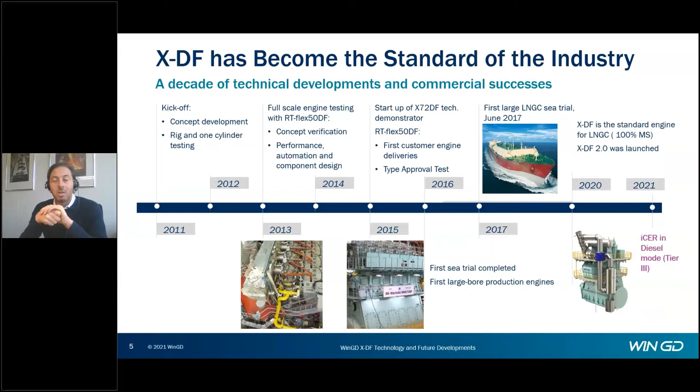We do this in 2 ways. One is to increase the efficiency of the engine, reducing gas and fuel consumption, and reducing maintenance. This year, 2021, we upgraded to the XDF 2.0 with iCER technology, using the same hardware, to reduce maintenance and increase efficiency, also in diesel mode to reach Tier 3, to reduce the CapEx.

Looking at the technology, at the concept of XDF: the secret is the low pressure. Low pressure means that we inject gas into the combustion chamber at 13 bar. This has several benefits. The first benefit is the gas supply system - 13 bar is a gas supply system that is relatively economically convenient. Also from a technological point of view, using the Otto cycle, we have very low NOx, much lower than the Tier 3 limits, and the efficiency is at a good level. So overall, the XDF is the best CapEx, OpEx product for LNG powered ships.

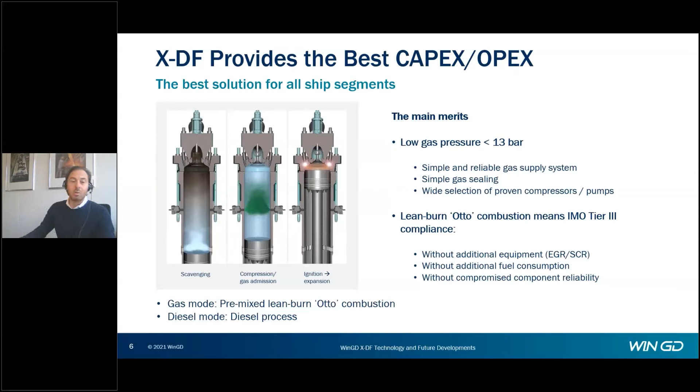Of course, we need to increase the efficiency and reduce the methane slip. That is the point that needs to be improved for the Otto cycle. There is a lot of margin for improvement, and that's what we are doing, what we have done, what we have solved with the XDF 2.0.

Let's have a first look at what the performance engineer wants to optimize in an Otto cycle engine: to enlarge the operating window. We have gas reactivity, which is an index of the lambda ratio, the air-fuel ratio. We have an operating window because we want to increase the BMEP as much as possible, but there are physical limits due to self-ignition or knocking. So gas reactivity or lambda control is very critical, and we want to enlarge the operating window as far as possible.

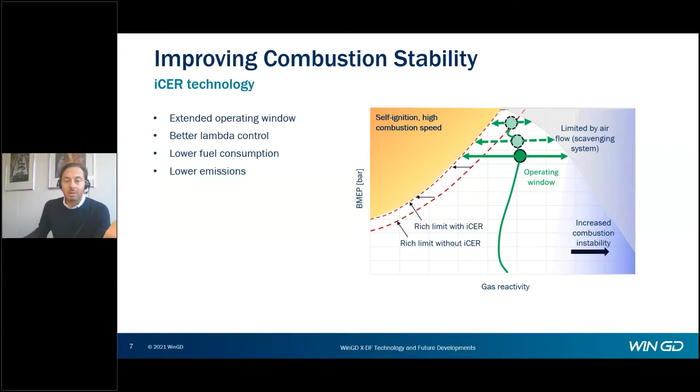That's why we came out with a solution: the iCER technology. iCER stands for intelligent control of exhaust gas recirculation. We recycle exhaust gas after the turbo, so it's a low pressure recirculation. Part of the exhaust gas is cooled and then reintroduced into the combustion chamber after the turbo, so it's a low pressure system.

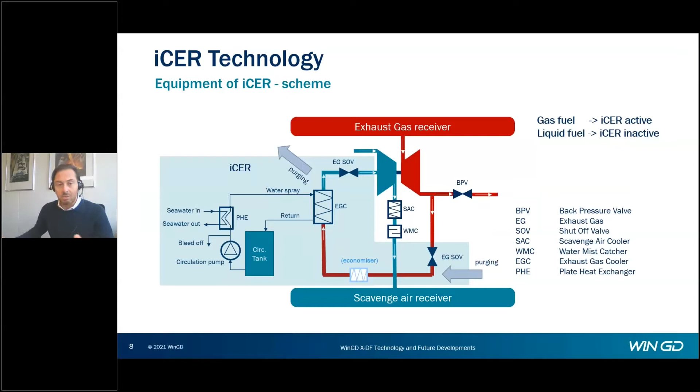Exhaust gas after the turbo is basically CO2 from the gas combustion. CO2 is, from the combustion point of view, an inert gas that facilitates combustion. In which way? I'll show in this slide. Introducing CO2 into the combustion chamber has the effect of reducing the firing pressure. The more we recirculate, the more we reduce firing pressure, and then we can also adjust the pilot injection.

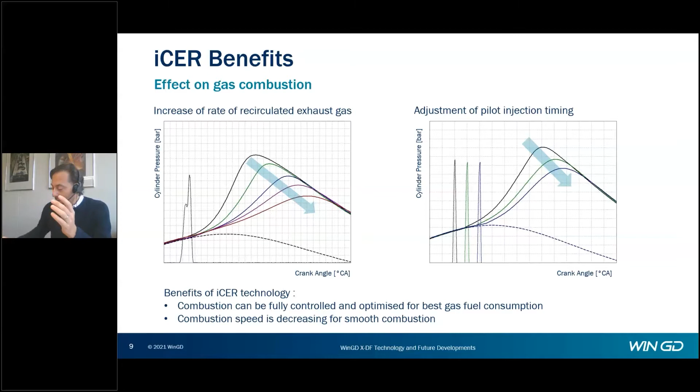So you can see we give our performance engineer another dimension to optimize the engine. Put simply, what we can do is increase the firing pressure, increase the compression ratio, and also change the injection timing. In this way, we achieve a reduction in gas consumption, a reduction in liquid fuel consumption in diesel mode, and most importantly, we reduce the methane slip.

We reduce the methane slip because of two important effects. One, the combustion is more stable, so we have less unburnt fuel. Second, because of the recirculation, we reduce methane slip by 40% to 50%.

That is remarkable, because I remember 10 years ago, the industry standard for methane slip was 6 grams per kilowatt hour. Today, with XDF 2.0, we are below 1 gram - we are at 0.8 grams per kilowatt hour. So the message is that methane slip is a technological problem, and there are solutions to solve it. That's a very important step forward.

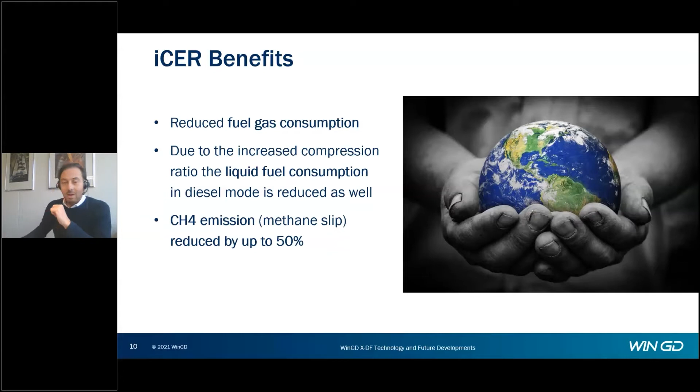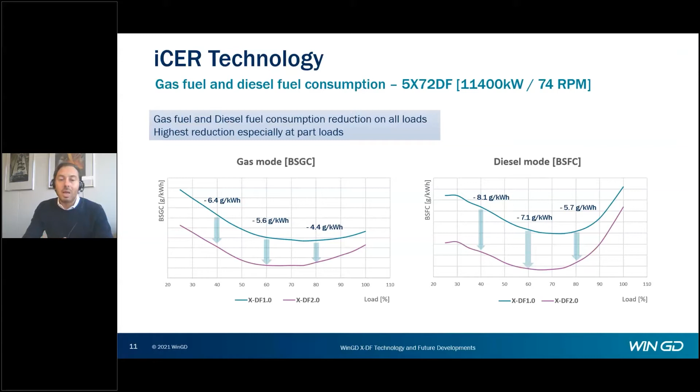But let's look a little bit at the reduction of gas consumption, which is also very important in terms of CO2 emissions. In gas mode, the reduction is between 6.4 to 4.4 grams per kilowatt hour, depending on the load. In diesel mode, iCER is bypassed for Tier 2 operation, but the reduction in fuel consumption is still applicable because of the increasing compression ratio - we are between minus 8 grams to minus 5.7 grams per kilowatt hour.

Compared to the traditional diesel engine, we have 20-25% less CO2 emissions. This is the first step for decarbonization, where WinGD is fully committed. Of course, if we look at the global picture, it's not only CO2 impacting greenhouse gas, but also all the emissions that impact air quality, like NOx, SOx, and PM, which we reduce to a very low level.

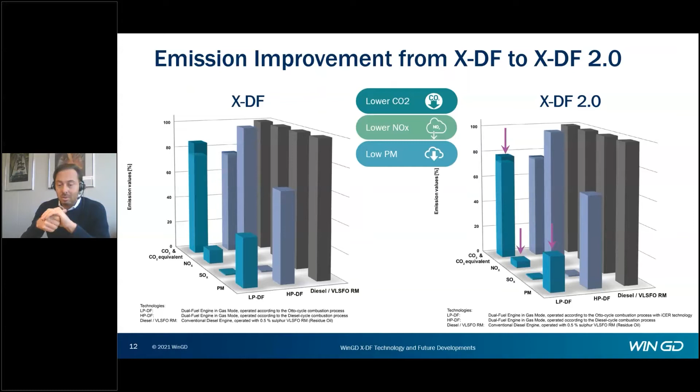So let's have a look at the iCER technology itself - how it looks on installation. It's an off-engine solution that needs to be installed close to the engine. We worked with major shipyards to have this accommodated in the engine room. This hardware is used in gas mode for reducing methane slip and increasing efficiency, but also recently this year, as I mentioned before, it's used in diesel mode to reach Tier 3 level. That's also a good compromise to reduce capex, because with the same hardware we also reduce the NOx level.

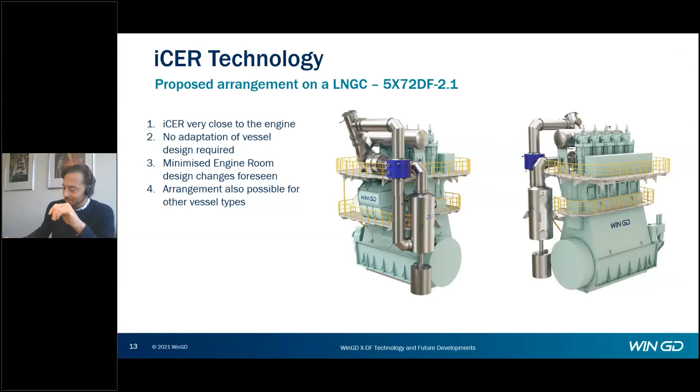So thank you very much, and just the concluding word is X-DF from Winterthur Gas & Diesel is the initial step to decarbonization. We are also considering alternative fuel to be burned in the same engine platform. So hand over to you, Jeremy.

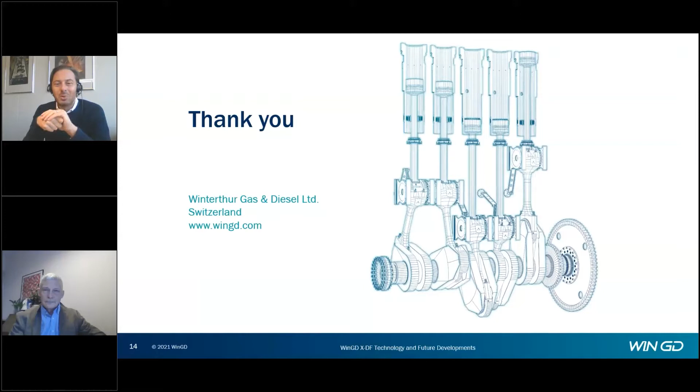Super, thank you very much, Carmelo. That was a nice introduction to our session today, and really impressive to see, in particular, the emissions reductions that you have brought into being.

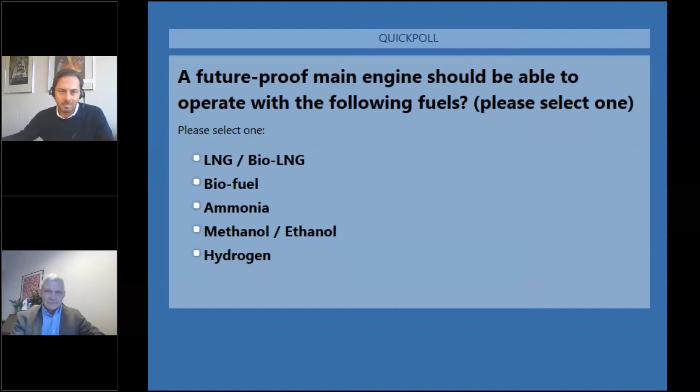Super, I see we've got a lot of results, a lot of votes in. Carmelo, perhaps I could turn to you to kindly interpret those findings for us in this short space of time that you've had.

Yeah, thank you. Very interesting to see this result, very useful also for us. As I said before, we are fully committed to finding alternative fuel to decarbonize. Very interesting to see that ammonia and LNG are considered the future fuel. Also hydrogen, that is very interesting and also useful for us.

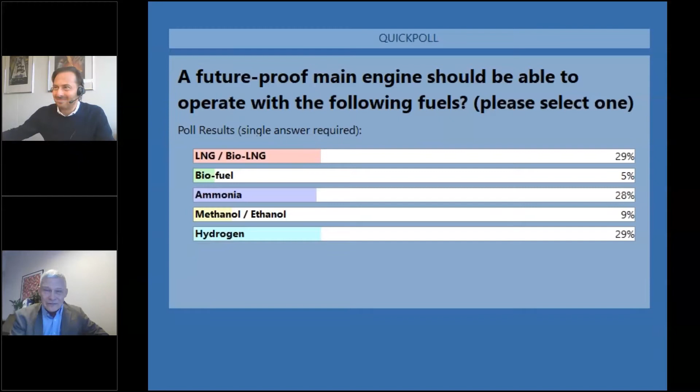Well then, thank you, Jeremy. Good day, ladies and gentlemen. It's a pleasure to be here, and I will tell you a little bit about the service experience which we have on our ever-growing XDF fleet, and also I will have the pleasure to give you a brief outlook into the future on a recently announced upgrade of the very popular X72DF engine.

So, a quick look into the engine shop. We have a huge variety of XDF engines which passed their factory acceptance tests or are under R&D testing. Meanwhile the picture is very complete. We have the first 40DF engine which passed its FAT in China just last month, and the very first X82DF engine is undergoing R&D testing also in China, and with these engines we now have the full portfolio from 40 up to 92DF engines complete.

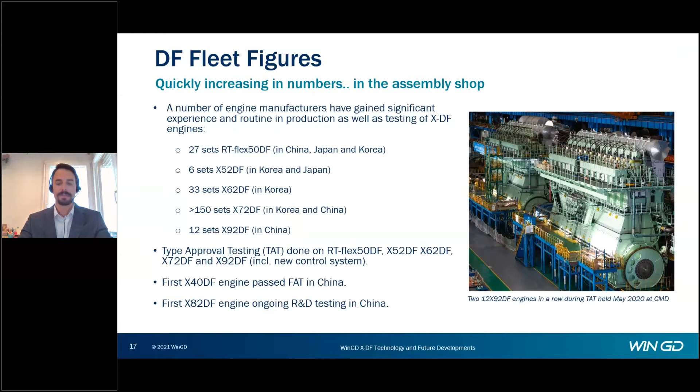We also have a number of more than 200 engines which passed their factory acceptance tests on the former popular bores, the 50, 52, 62 and 72, including 92DF engines.

Looking at the shipyards, the picture is equally impressive. As of today, we have more than 100 DF engines in operation, which have surpassed more than 1 million accumulated running hours. The longest running ship has more than 26,000 running hours. And we have a huge variety of vessel types which are using our XDF engines.

Some of you may remember it started with the Terntank series back in time, product carriers operating in the Baltic Seas. But soon thereafter, LNG carriers started taking over, tankers of various sizes, ice class tankers. More recently we also have had the first bulk carrier, shuttle tankers, and of course the ultra large container carriers from CMA CGM, which entered operation powered by XDF.

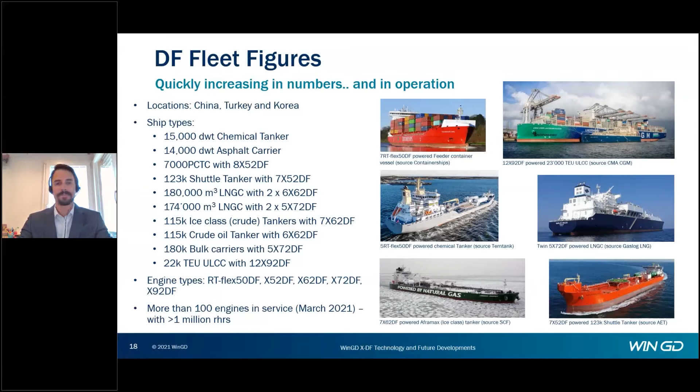Now we move over to some service experience updates. First topic here is piston running. Piston running, of course, is always an interesting topic on two-stroke engines, and on our XDF fleet, in particular on the mid-bore DF, we did have a few learnings, and they are outlined here.

As a matter of fact, some cylinder liners were lost in the second half of 2019 and early 2020, and we were able to trace back the incidents there to, first of all, water ingress in the cylinder liner through the pre-chamber. On the 72DF in particular, we did have a design flaw, and this was rectified by adopting the design to the same dimensions as we have on the other engines on the 50, 52 and 62DFs. So this is resolved.

A service letter was also released in this respect, and the whole fleet was upgraded.

The second topic is actually that the cylinder lubricants from the first generation, simply taken over from diesel applications, were not suitable for the Otto cycle combustion, resulted in deposits in the ring grooves, sticking piston rings, and thereafter, let's say, arising piston running troubles as well.

Also associated partly with the cylinder lubricants is thermal load. We have seen that in Otto cycle combustion, the thermal load on the combustion chamber components is higher, in particular on the cylinder liner running surface, and this brings some additional challenges to the cylinder oil. We have had some improvements on the jacket cooling water system, which needed to be implemented to control the cooling water temperature, respectively the liner wall temperatures.

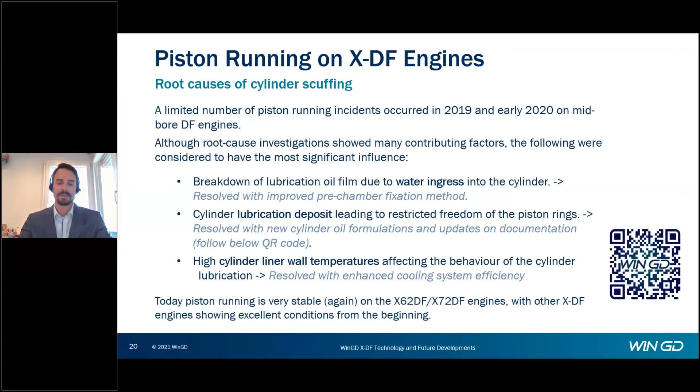Some words about the jacket cooling water system, which was, let's say, creating some challenges from the very beginning. We realized that venting is important, and the alignment of the water guide jacket. If that one is not properly aligned, we can actually face the issue of internal bypassing in the cooling circuit. This we have to avoid. At some point, we realized it is important, if there is an accumulation of air bubbles or gases in the cooling circuit, to get rid of them by air separators. They became standard again on the new builds from 2018 onwards.

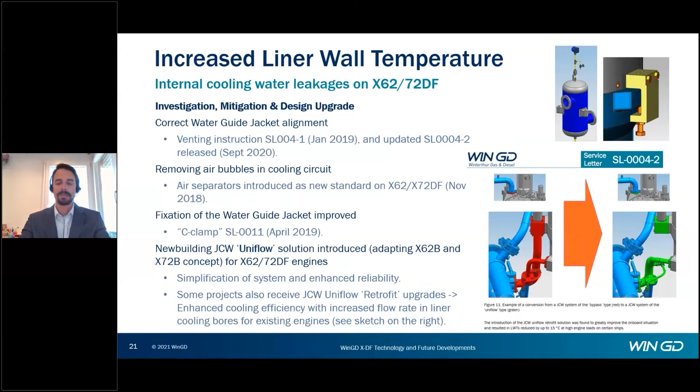And then more recently, we went back actually to the so-called Uniflow design for the new builds, but also offering it as retrofit for ships in operation, where the whole water flow is led through the liner. So we move away from the bypass solution of the first generation back to Uniflow, having seen the advantages of this system.

Now something about the more recent engines which came into operation. Here this is about the X52DF. We have the first engines now in service since roughly 1 year. This is the first XDF engine which is actually featuring a 2-ring piston design, and we have seen excellent running conditions, not only on the piston or combustion components, but also generally. The engine was attended for a major inspection last month, and we have seen that everything looks as good as it could be after 1 year in operation.

Not on this particular vessel, but on a later delivered X52DF, we also have the first IGPR applied, and this system proves to work very well on this car carrier.

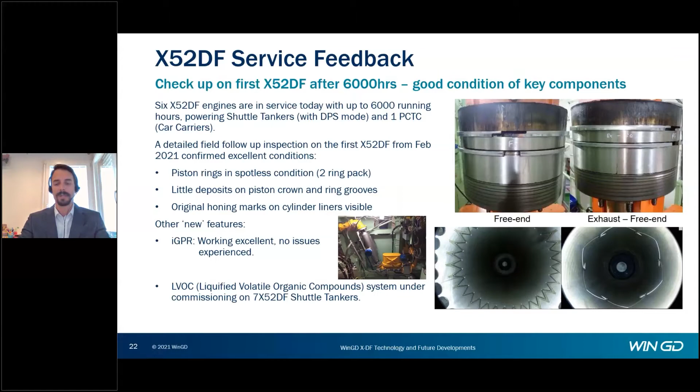Moving over to the biggest bore, the X92DF, where meanwhile 6 vessels are in operation. The very first ship of this series of 23,000 TEU container vessels, the CMA CGM Jacques Saadé, was delivered in September 2020. The maiden voyage, of course, was attended from our end, and we have seen that there are no major issues on the engine design as such. There were a few challenges, vessel specific, partly related to quality, but on the design itself, we have not detected any major flaws, which is of course very positive.

The IGPR system is applied from the beginning on these ships. It works very well, and also the WiCE control system, our new engine control system, first time applied on a DF engine, proves to work surprisingly well, I must admit. So that was quite a relief for us, and this is also quite a positive sign for the other engines in the portfolio which will get the WiCE control system.

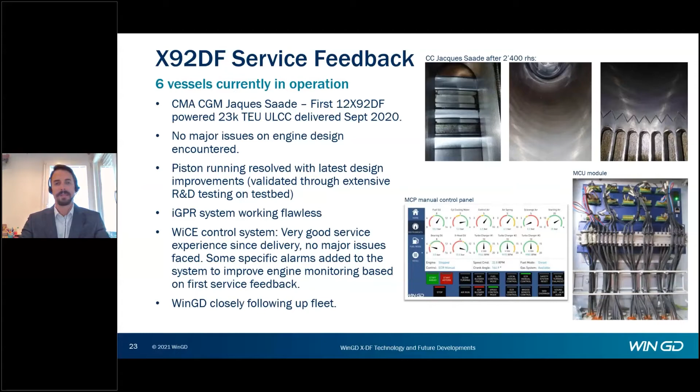Now this is something about overhauling after 3 years in operation. In the second half of last year we had a chance to attend a major overhaul after roughly 3 years on the very first 62DF engine in operation, 21,000 running hours. We have seen piston running on this ship was excellent, with wear basically being 0 or close to 0. So theoretically, let's say, endless lifetime if you want.

The gas admission valves proved to work very, very well. This is our own development, and the only thing which had to be done there was lapping of the valve seats. So they will be ready now for the next 3 years of operation. Also the pilot fuel injection system, another WinGD specific with a pre-chamber technology, works very well. The wear rates, if any, are very, very low.

So we see the potential, and we actually implemented already a first extension of the TBO time, and with further growing running hours and experience, we will surely have the capability to extend those figures even further, which will of course directly result in an OPEX reduction for the operator.

Main fuel injectors: there we have seen that those, even though they are not in operation, will need regular maintenance, and that is because the main fuel injector nozzle tip is exposed in gas combustion to the hot combustion environment, and this leads to aging of the material. So those will actually need replacement every 8,000 to 12,000 hours, as we have stated in the manuals.

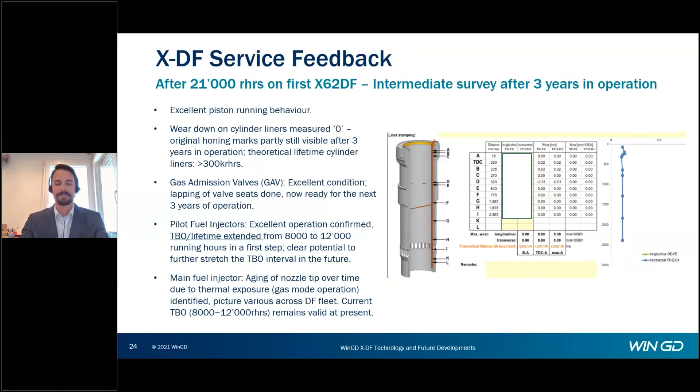A few words about service letters. A service letter, of course, is always a chance to react quickly to something which is seen, to reach out to a huge fleet of customers, also using the network from Wärtsilä to spread the word and alert customers if something needs to be looked at carefully.

Maybe of interest here is the uppermost one, service letter 0015-1. This was released more than a year ago, and it deals with the pre-chamber upgrades, which I mentioned earlier, which are relevant for the piston running. Then we had an important update in August last year for control parameters on injection equipment, SL0025.

The 0016 in September gives advice on how an operator can run his engine if he's disabling the iCAT system, so he wants to use only one cylinder oil, which is possible for most applications and the low sulfur fuels in use nowadays. Service letter 0004-2 from September is an upgrade giving the latest recommendations on the cooling water system on the mid-bore DF engines with the Uniflow and so forth.

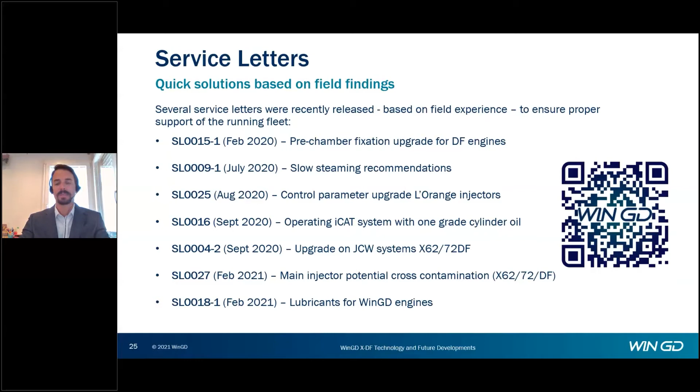Finally, service letter 0027, released in February this year, is about the potential cross-contamination of main fuel injectors if old and newer parts are mixed, which can happen in the field. And the latest update on lubricants was released in February, 0018-1. This one gives an overview of the lubricants, namely cylinder lubrication and system oil, not only for our XDF engines but generally for the portfolio of WinGD engines.

Summarizing the DF service experience as we have it today, with more than 1 million accumulated running hours: the engines are running well. The fleet is quickly increasing. We have new ship types delivered. We have new engine types entering service, which is very nice to see. We did have, of course, at the beginning and throughout the journey, a few challenges, but they were tackled in a systematic manner and resolved. And we keep closely monitoring the success and behavior of the XDF engines in the fleet sailing around the globe.

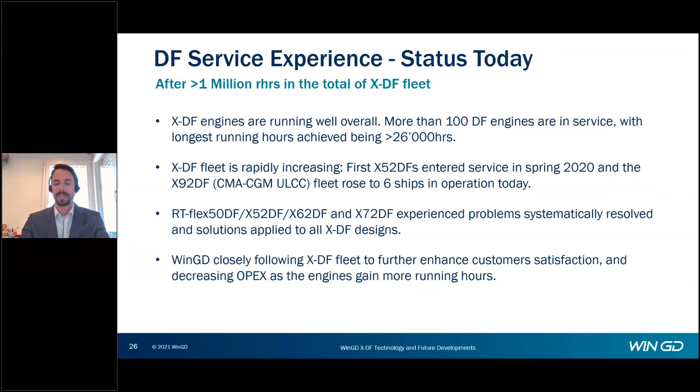A word now about the support of the operating fleet, because that is very important. The customer not only wants a good engine, but also wants support if he's in need. Here we work closely with our service partners. We do not have our own service organization, but Wärtsilä, with its global network, is a trusted partner for planning attendances, service support, operational support, whatsoever.

But this is not only for the hands-on job, the board attendances and the spare parts, but also a very important topic, especially throughout the COVID situation with limited traveling: remote support. Wärtsilä, with its remote support capabilities, the 24/7 support and their level of expertise, has proven more than once to be very effective, helping customers in need get their ship and engine back afloat and running, and we are very grateful for that.

So in this respect, we have a good cooperation between WinGD and Wärtsilä, and especially a learning from the COVID times is that remote support is important, and it can help a customer in need tremendously. On-time support, this is what counts.

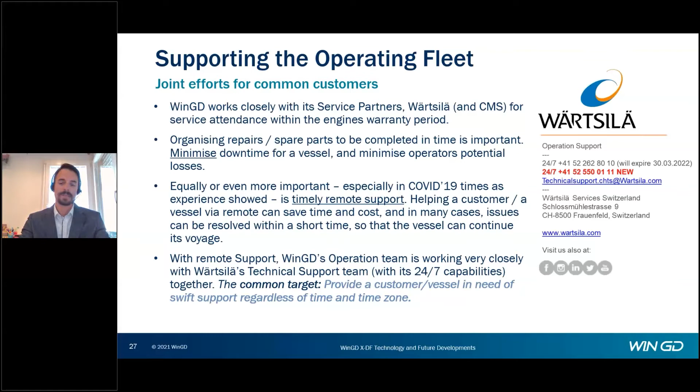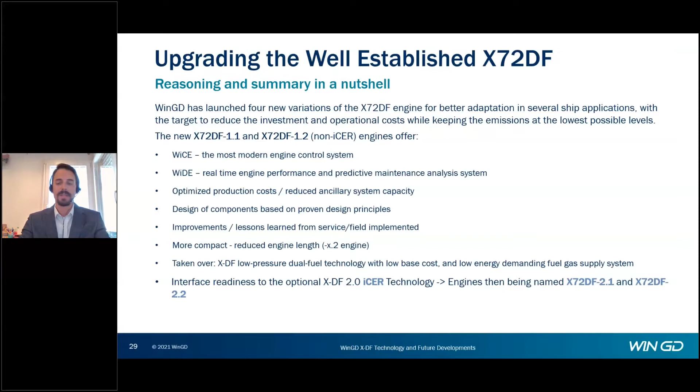And now we move over to a few words about the future, our next generation. The new 72DF engine was announced by a press release in mid-February, and that's actually too much text here, I admit. Basically, what we want to do is combine new features and a new control system with meanwhile validated technologies from other engine types, bundling this into a nice and compact upgrade fitting the market needs of different engine types.

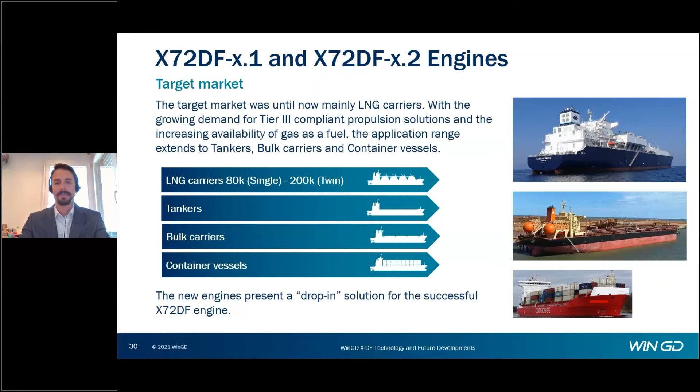Not only LNG carriers, where the 5-cylinder engine became quite popular, but also targeting other vessel segments to be powered by optimized XDF engines of the next generation. The new 72DF engine, called 1.1 or 1.2 respectively, then 2.1, 2.2 for iCER application, will be a drop-in solution, and it will fit into existing ship designs.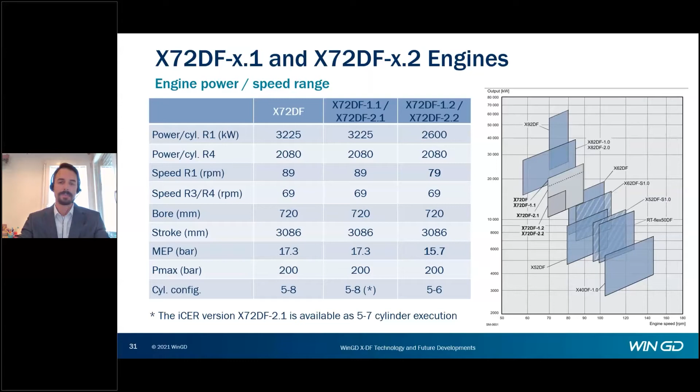This is the dark gray area, and that is the x.2 versions of the 72DF, available as 5 and 6 cylinder only with a reduced power output. But this actually enables us to optimize the engine design, the engine structure, to become lighter, to become more compact, and to implement also some other upgrades. And those are described here in this kind of table format.

We do have the 1.1 engine on the left-hand side as 5 to 8 cylinder, basically the same rating field as today's 72DF engine. But then on the right-hand side, we have the 1.2 engine. This is for 5 and 6 cylinder engines. That one will have a shortened bedplate. We have optimization on the structure, on main bearing girders. We have a shorter and lighter crankshaft.

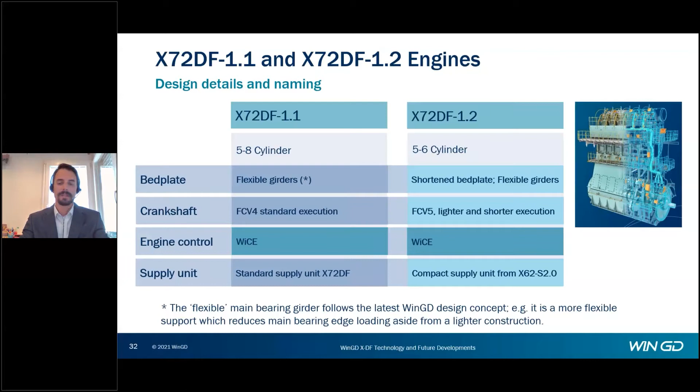We of course have the WiCE control system on both engines, and we also apply a more compact supply unit, which was taken from the X62S short stroke engine, because for this smaller rating field, a more compact supply unit is sufficient, featuring also smaller fuel pumps, which should have a better reliability and lower cost.

And the same table we do have actually for the iCER engines, where the only change basically is that the off-engine solution iCER is coming on top, but otherwise the engine structure and the optimization remains basically the same. So all these 4 engine types are now available, and we hope, of course, that there is a great future for them.

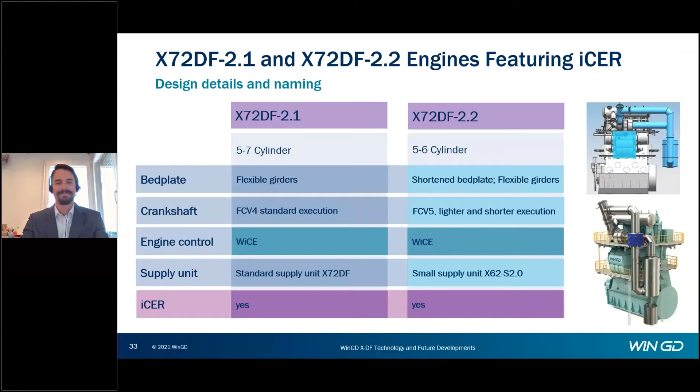Right, this is the last slide on the engine upgrade. Starting from top left, we do have the WiCE control system, as I mentioned. Then below, some weight optimization on the powertrain, crosshead, connecting rod, and so forth. This is under investigation. Looks very promising. We do have then the compact supply unit taken from the X62S engine. Bottom left, the bedplate with a shortened thrust bearing section. This is applied as well.

And when we move on to the right side, the shorter, lighter crankshaft. The scavenging, of course, will need to be adapted to the iCER system as such. Then, of course, piping and platforms, as usual, need to be adapted. And finally, hot parts, because with iCER engines, we are running with a higher compression ratio, to obtain the gains in fuel consumption, as outlined earlier by Carmelo.

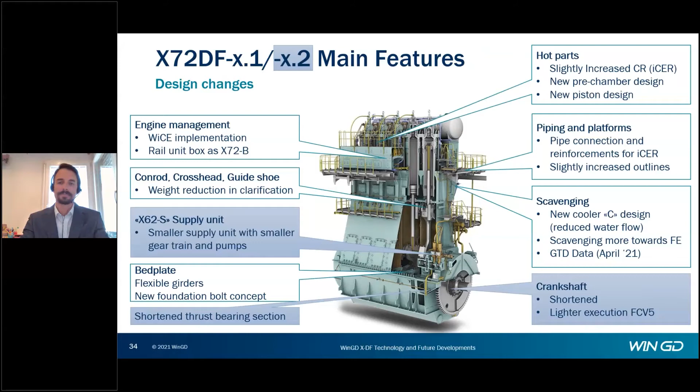Thank you very much, Adrian. Super presentation. I was particularly impressed by the helpful and inspiring confidence from your real-life operational experiences that you're able to share with us. I think also the COVID experience of the remote access really brings to life the value of that capability, not to mention the upgrades and future developments coming.

But with that, it brings us to our next poll. So you know the drill now, audience. If you'd kindly contemplate this question and answer to the best of your ability for your organization, this time you are asked to select your main business priorities. Choose the 2 most important to you from guaranteed asset availability, sustainable and predictable operations, fuel efficiency optimization, guaranteed maintenance cost, guidance, troubleshooting, tuning, and expert support. We'll give you a couple of moments to answer that poll.

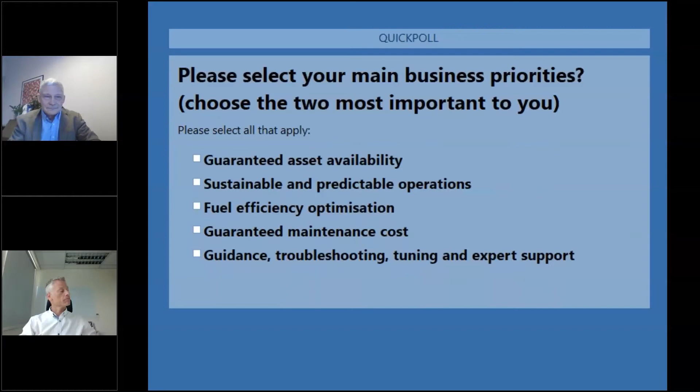Super, I see the results are in already. Thank you again for making your selections. Jürgen, could you share your interpretation of these results for us? Thank you very much, Jeremy, and welcome everybody. I find this very interesting to read. The sustainable and predictable operations is, I would say, by far the most critical one from a business perspective. That's very good. And we also saw it already in the presentation from Adrian, where the remote support and the guidance and troubleshooting, especially during the COVID-19 situation, is highlighted here. Super, thank you, Jürgen.

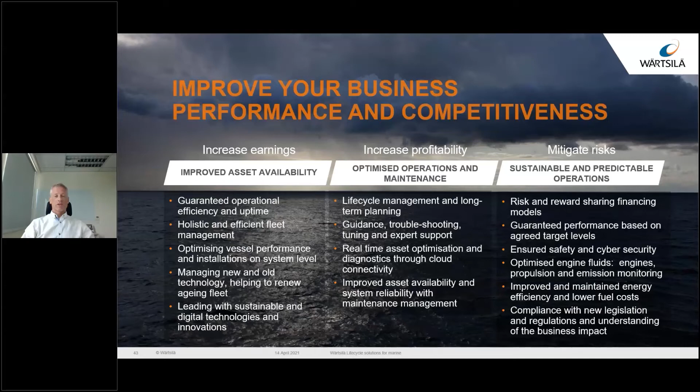So who are we? Well, we currently have well over 700 installations under long-term agreements. Just to talk a little bit about what customers are saying: for one of them, operating container ships, because it's a single engine operation, it is absolutely vital that the engine is operational and available at all times. On top of that, they find it crucial to have a 24/7 contact number and access to our technical support.

And the customer states very clearly that Wärtsilä takes responsibility. We make sure that the overhauls are carried out in cooperation with the operator, so that there is no influence on the operational availability.

So how do we do it? Well, one way is what we call asset performance, which takes a holistic view, where we are optimizing the maintenance and basically guaranteeing certain performance parameters.

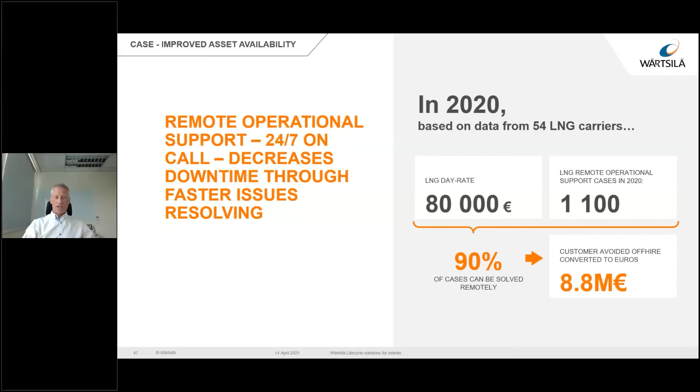If we would take these as, let's say, 80,000 euros per day charter rate, multiplied by the 1,100, and we have a 90% resolution online by direct remote support, 24/7, it means there is avoidance of 8.8 million in revenue. You as a customer are not losing this money. You are able to keep operating and perform as your customers are expecting from you.

Then when we are looking at the unscheduled section, and we mentioned it already before with the Expert Insight, we are able to reduce these costs. And again, out of the same fleet and the data we have, by preventing and by identifying problems early enough, we are able to reduce by 70% the unscheduled maintenance cost. Looking at a whole fleet of 54 installations, that means we have saved you, your customers, 3.8 million euros on unscheduled maintenance.

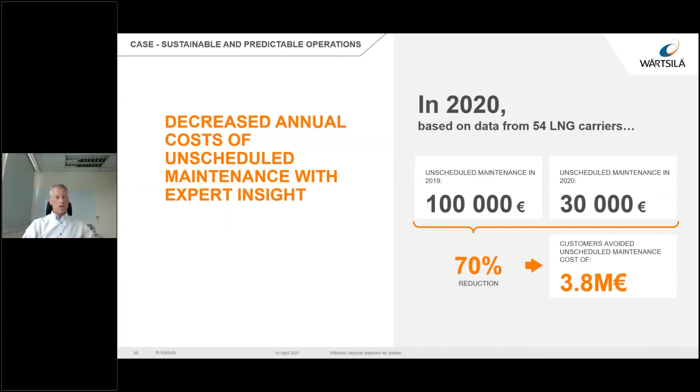So what else is there? Well, by having this kind of proactive and early detection, we are able to also reduce the duration. Every time a customer is calling and there is an issue, we had in 2019 maybe up to 3 days. Currently, we know that with the Expert Insight and the remote support, we are able to reduce this by 50%. So we are on average at 1.5 days. And this again means another 6.5 million revenue which is being saved, which you're not losing because of off-hire.

It's not only the LNG vessels, it's not only one specific sector, but we have a very wide base. We are looking at merchant, where we have the LNG carriers, the container vessels, the cruise and ferries we have covered. We have offshore vessels as well as special installations. Very wide installed base and well over 700 marine installations where we have a Wärtsilä lifecycle solution.